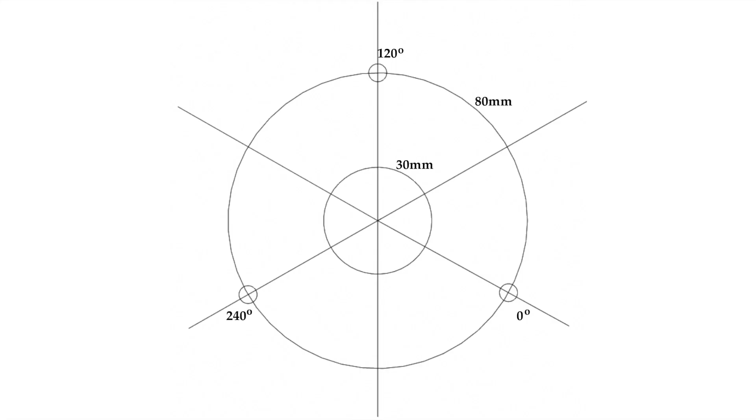Okay, we need to lay out the shaft connector. Here are the measurements: 30mm center hole, 80mm 120-degree bolt pattern. Drill out the bolt pattern. Draw 3 lines across the disc. Next, we will align the wing mounts with these lines.

Using 2 wing mount sections, align them with the first line, mark the holes, skip a line, and repeat. Then, skip a line and repeat again. Now we'll drop a small screw in the middle hole. Place the other disc under. Make sure the screw aligns the 2 discs, clamp together, and drill the hole pattern from the last step.

A light surface sanding. Here's where my last paint job failed. On the edges. This time I want to ensure that the wood is properly sealed, using marine grade epoxy and putting it on thick. This wood is thirsty. It drinks this epoxy up. You really have to work it in. At least 2 coats are needed for proper coverage. Don't forget your respirator. This stuff can't be good for your lungs.

Okay, after 2 coats of epoxy, we need to drill the shaft connector holes. The large one in the center accommodates the shaft. The 3 smaller holes are for the mounting bolts. Needless to say, an electric hand drill makes this a lot easier. Now we'll get started on a couple of coats of epoxy on the back side of these discs, paying particular attention to sealing the newly drilled holes.

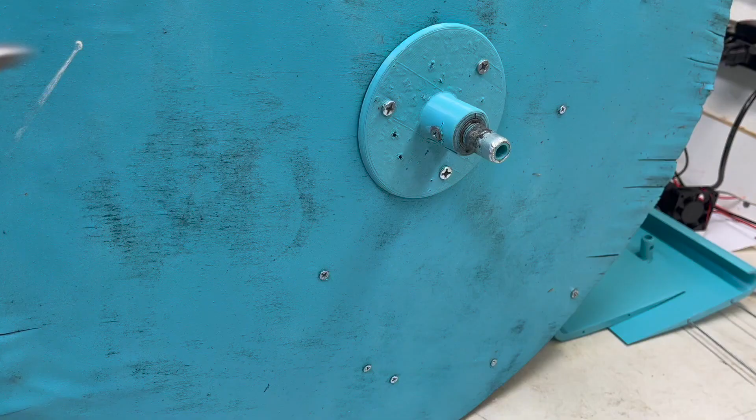Alright, let's pull this thing apart. We'll start by removing the bolt in the shaft connector that retains the shaft bearing adapter.

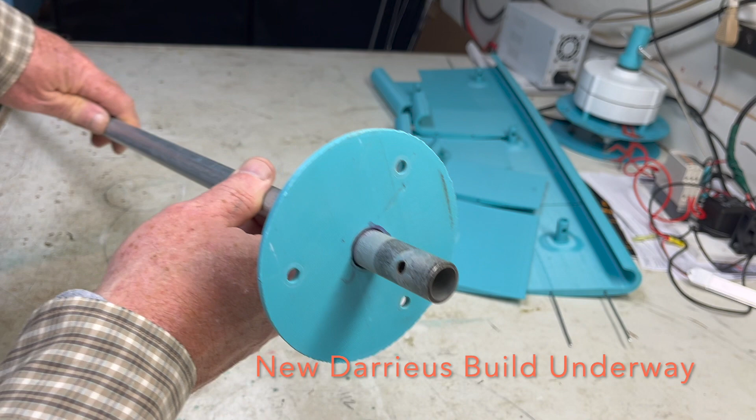Okay, back to pulling this thing apart. The top deck is secured with wood screws. Screws hold tight to the 3D printed parts, and they're much easier to install than bolts. The most important connections are around the perimeter. Nuts and bolts help align the wings and ease assembly. Alright, we're ready to pull the top off.

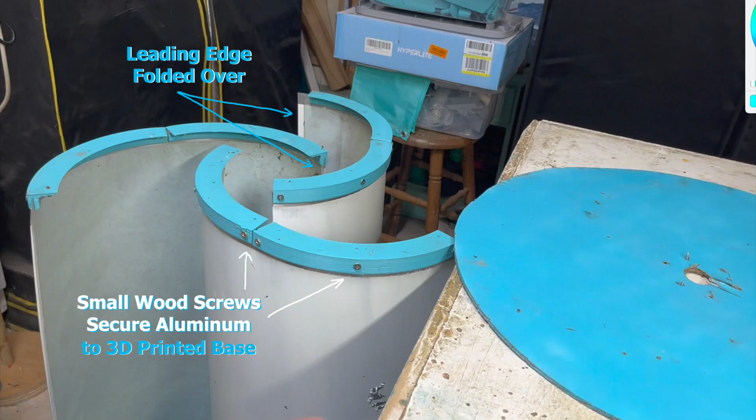Let's look at the aluminum sheets and 3D printed parts used in this design. You can see here that the leading edges of the aluminum wings are folded over. This is for strength and safety. Again, wood screws are used to secure the aluminum wing to the 3D printed parts.

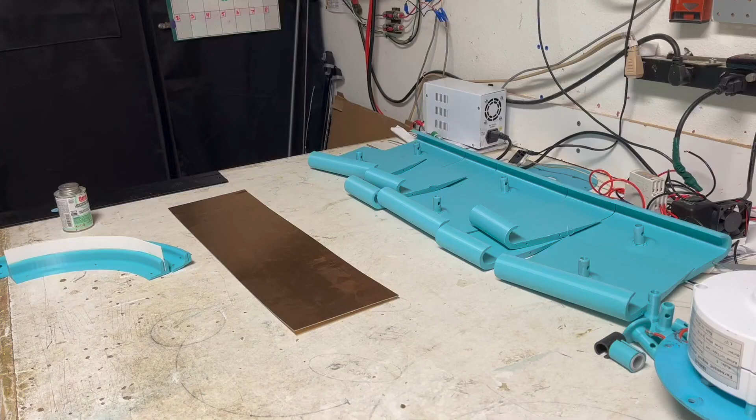Now I'm going to do a demonstration as to how these wings are constructed. It's not part of this build, but let me show you how the 2mm version is constructed with PVC sheet and ABS to PVC glue. More on this in a subsequent video. Next, we'll look at the 1mm Savonius base.

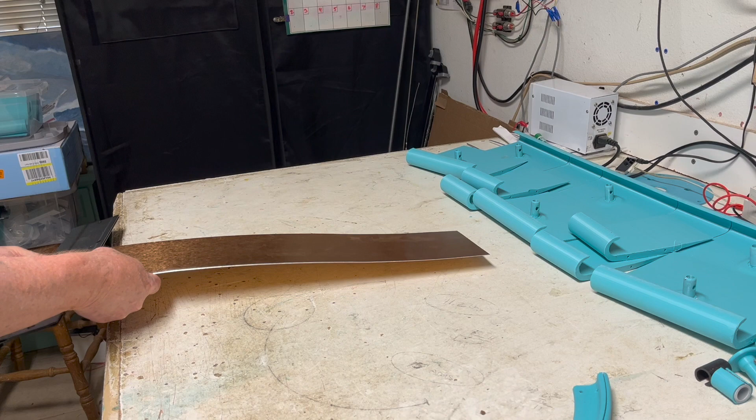I've got a scrap piece of aluminum sheet from a previous project. The copper covering is pretty but very expensive. A sheet metal folding tool makes this easy. Flatten out a bit further with a smooth hammer. Both ends of the sheet need to be folded for strength and builder safety. This aluminum sheet can be quite a dangerous cutting hazard.

Be careful. Now insert the aluminum sheet into the Savonius base part. It slides in quite easily. Don't force it. 2 sections of the Savonius base are needed for the top and 2 for the bottom of each wing.

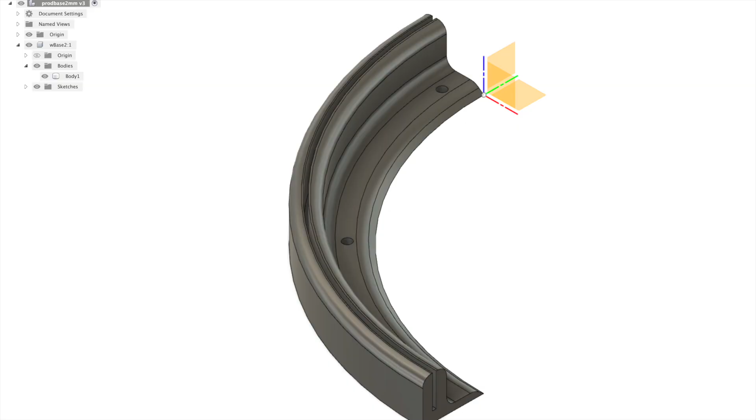Now that the epoxy is dry, we'll start putting this VAWT back together. Make sure the hole patterns line up. Start filling holes. Bolt through from wing mount to deck. Bolt the perimeter first. This retains the wings in their proper place for further connections. An awl makes for easy alignment of the deck attachment holes and the wing mounts. Take your time, it'll all come together.

I find that wood screws work well to combine the top deck to the wing mounts. The ASA holds strong. Continue around the deck, making all required attachments. Turning screws can be quite cathartic.

Next, we're going to flip this thing over. The bottom is bolted. No wood screws. Notice the Loctite on the nuts. You don't want these nuts to fall off. Remember, this is the bottom. Okay, let's get rid of this old blue disc. I won't go back over the alignment and rebolting procedure for the bottom. The only difference on the bottom is we use all nuts and bolts, no wood screws.

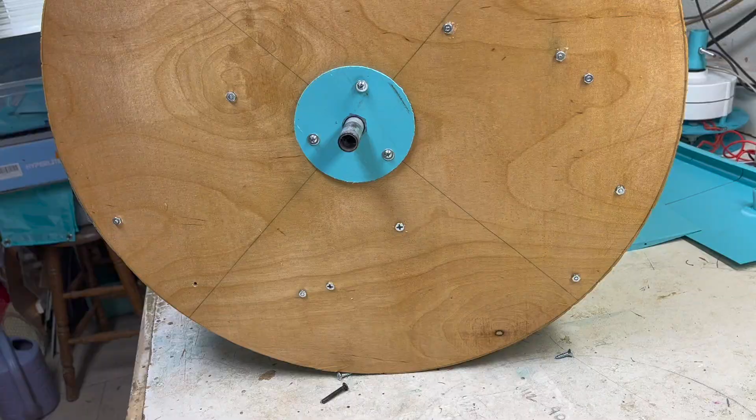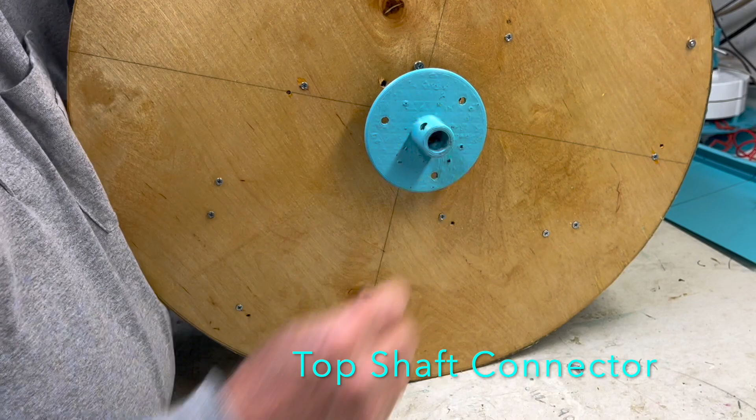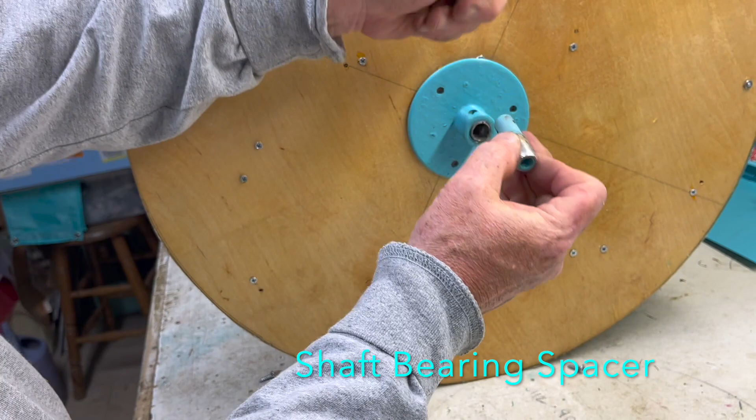We insert the shaft assembly from the bottom and secure it with bolts. Next, we flip the unit and install the top shaft connector. Notice this end sticks out. Seat the shaft connector, then align it with the hole in the shaft. Insert the shaft bearing spacer, align the holes, bolt through and tighten.

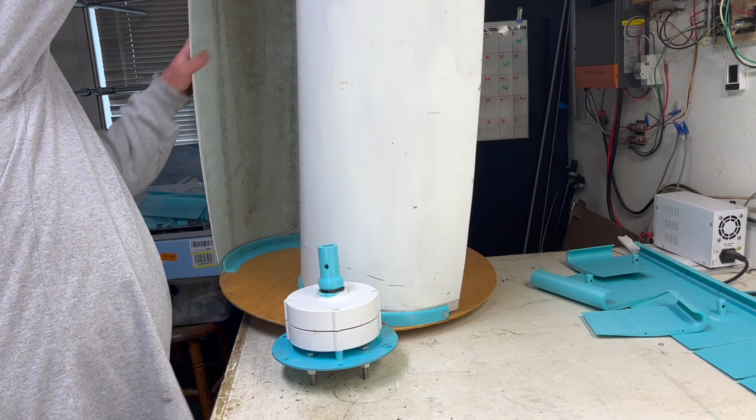Next, insert the housing bolts and secure with nuts on the inside of the deck. Notice I put a piece of tape around the end of the bearing spacer. This provides for a snug fit later. Okay, let's set this onto an alternator. This alternator is store-bought. The connection is made with an adapter that I designed in Fusion 360.

It's available at twirlything.com. Oh my, this really looks lovely. I think the epoxy will work much better.